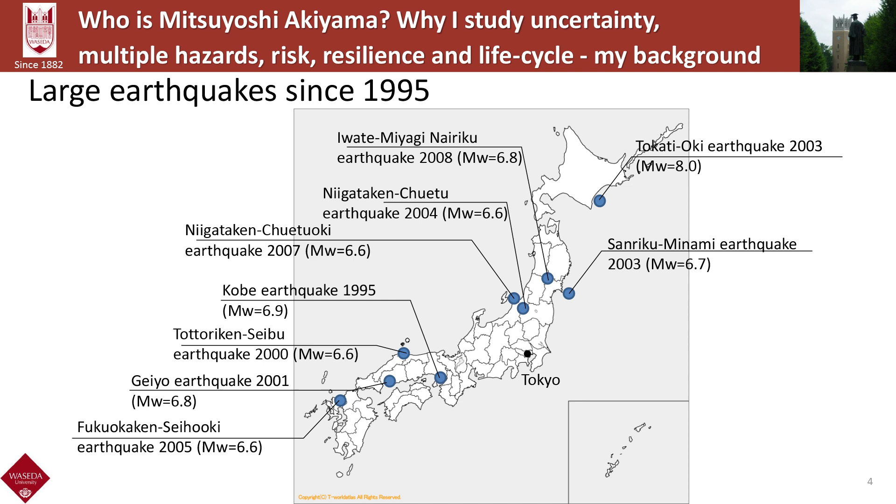Professor Kusunoki and Professor Hisada mentioned we have had so many disasters in Japan. I graduated from Tohoku University in 1995. Since then, we have had so many large earthquakes with moment magnitude larger than 6.5. In Japan, if moment magnitude is larger than 6.5, we say it's a big earthquake, so some infrastructure may have damage. So we have had so many big earthquakes since 1995.

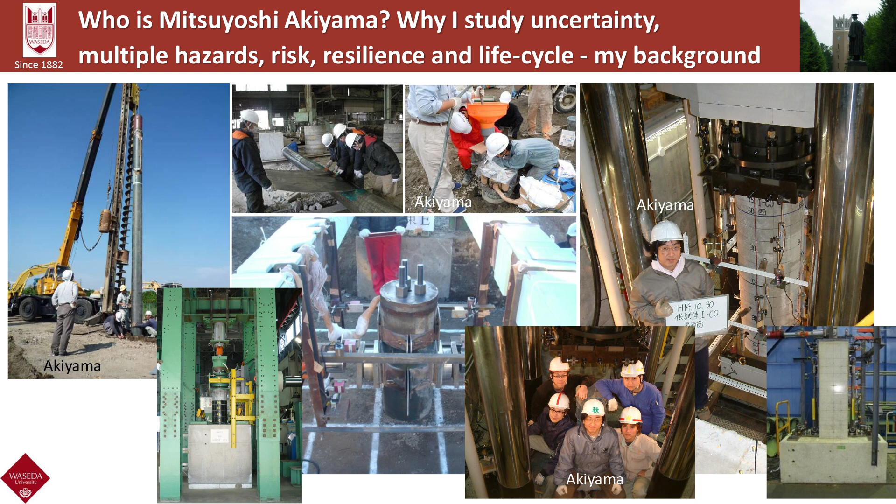My bachelor, my master, and my PhD research theme was all seismic. I conducted many experiments with the students at Tohoku University. After getting my PhD, I worked as a research associate, assistant professor, and associate professor, and did many seismic experiments and computations. At that time, I strongly believed my mission was to contribute to developing safer and more sustainable cities against big earthquakes.

But I made a big mistake. In 2004, as you know, the Indian Ocean tsunami occurred, and more than 200,000 people were killed. At that time, Tohoku University had a very unique research institute of tsunami. If my understanding is correct, there were only two research institutes of tsunami: one in Tohoku University, the other in Hawaii.

Professor Shuto asked me, why, AKIYAMA, do you only focus on ground motion? You also need to study the design of bridges and infrastructure against tsunami. But as I mentioned, at that time I strongly believed my mission was to do research on seismic issues, seismic design. So I didn't care about it.

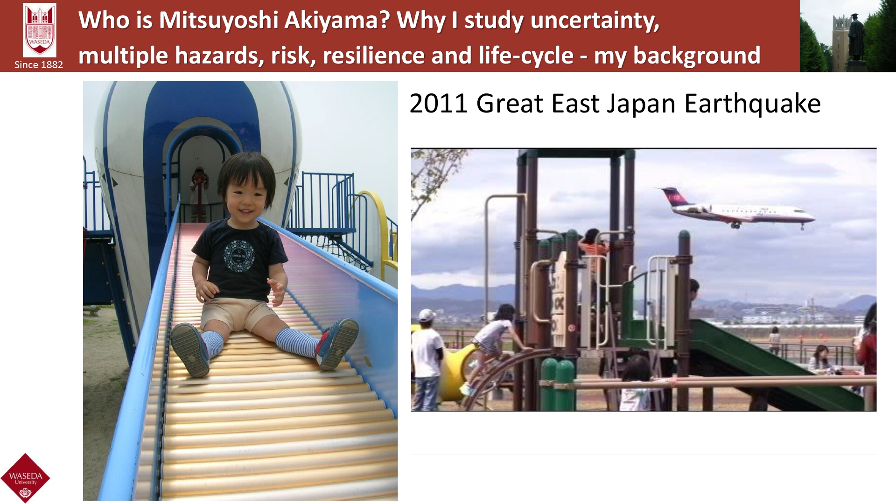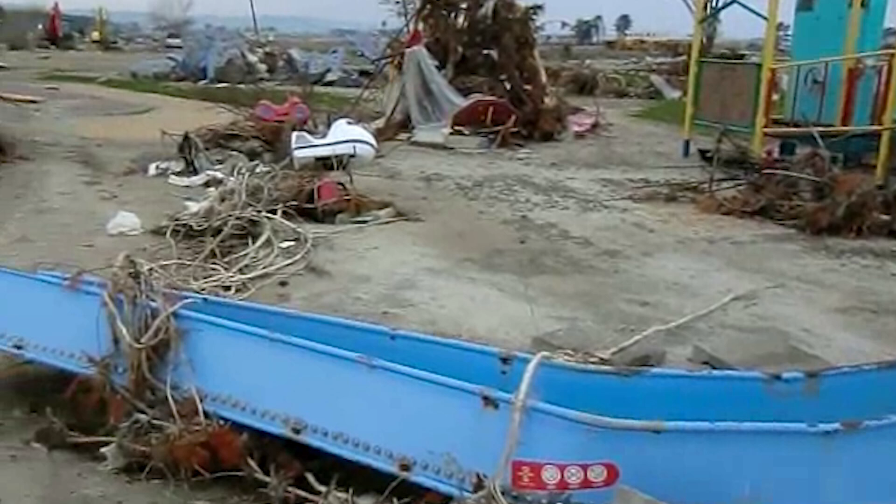In 2011, the Great East Japan earthquake occurred. At that time, I was still associate professor at Tohoku University, working with Professor Hisada. I often took my son, Ryuzo, to the park near Sendai Airport. He really enjoyed this park because he could see airplanes, and it is located very close to the coastline, so he could see the Pacific Ocean. This is a slider he enjoyed. All the facilities were completely destroyed. This is Sendai Airport.

So I made a very big mistake. I thought my research theme was to study seismic design or seismic assessment of performance of bridges. But in Japan, we have so many other disasters. So it's meaningless. We have to protect our infrastructure from all natural hazards.

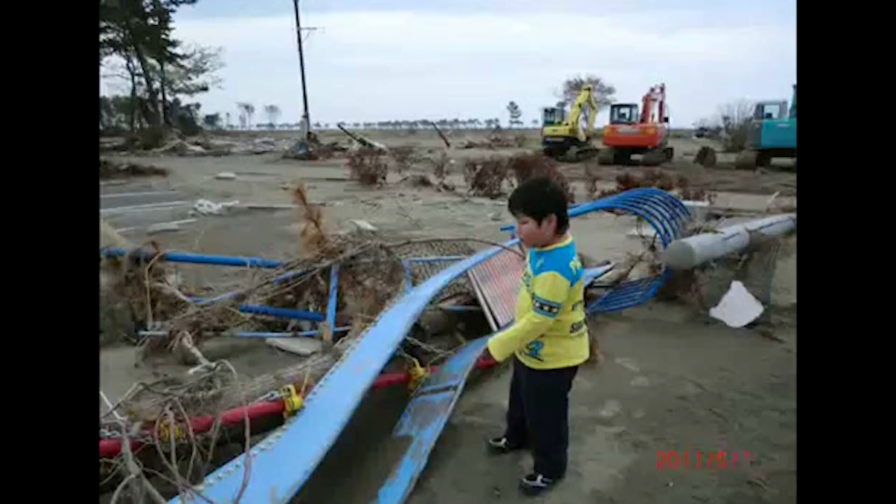Since then, I try to expand my research field. Fortunately, as I mentioned, I began to work with Professor FRANGOPOL in 2008. He's really a specialist of multiple hazards. He encouraged me to expand my research field to include other disasters.

Professor Hisada already introduced his office. This is my office at Tohoku University, and this is the building including our office. This building was completely destroyed and demolished. It's funny because I was teaching seismic design of concrete structures in this building. Then I realized I'm not qualified for teaching seismic design of concrete structures. Anyhow, then I moved to Waseda University in 2011.

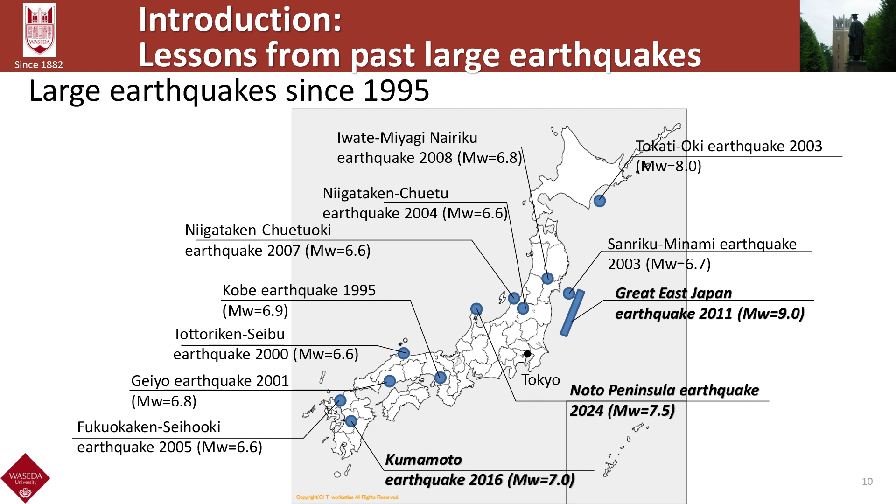I will introduce some lessons from three big earthquakes, including the 2011 Great East Japan earthquake, the 2016 Kumamoto earthquake, and the 2024 Noto Peninsula earthquake. Some pictures overlap with Professor Kusunoki's, so I will skip some slides.

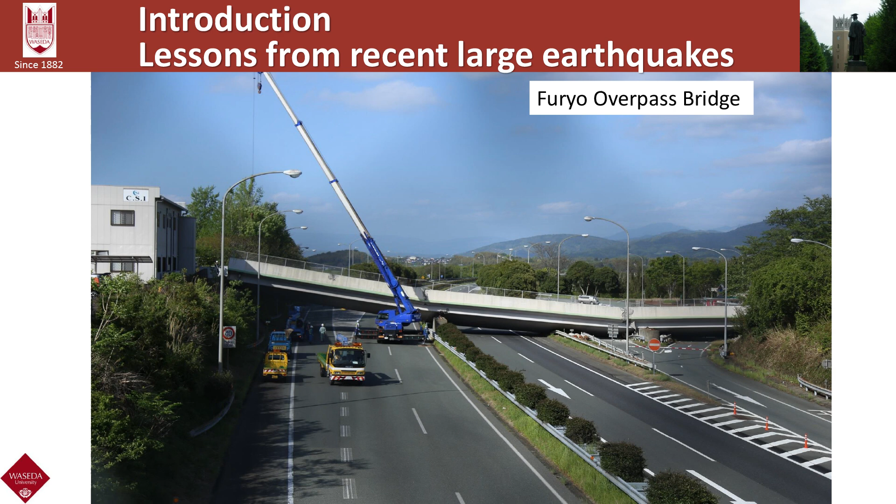This is an overpass bridge, completely collapsed due to the ground motion of the 2016 Kumamoto earthquake. This collapse prevented traffic passage on the Kyushu Expressway.

Actually, this is a local overpass bridge and not so important for local community. However, once the overpass bridge collapsed, this can prevent the traffic passage of highway, expressway. So we have to prioritize the seismic retrofit, considering this point importance.

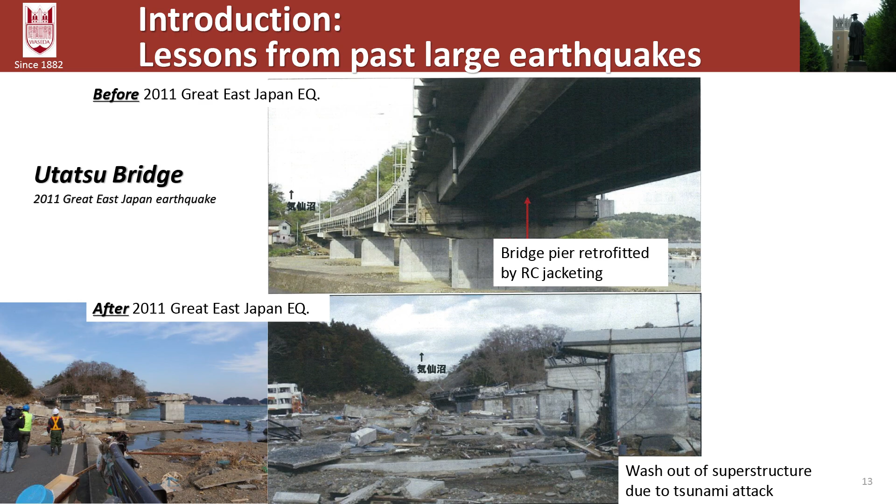Also, these are pictures taken before and after 2011 Great East Japan earthquake. You can see the concrete color is different because this bridge pier was also retrofitted using reinforced concrete jacketing. This seismic retrofit could prevent the damage from ground motion. However, this couldn't prevent washout of the superstructure.

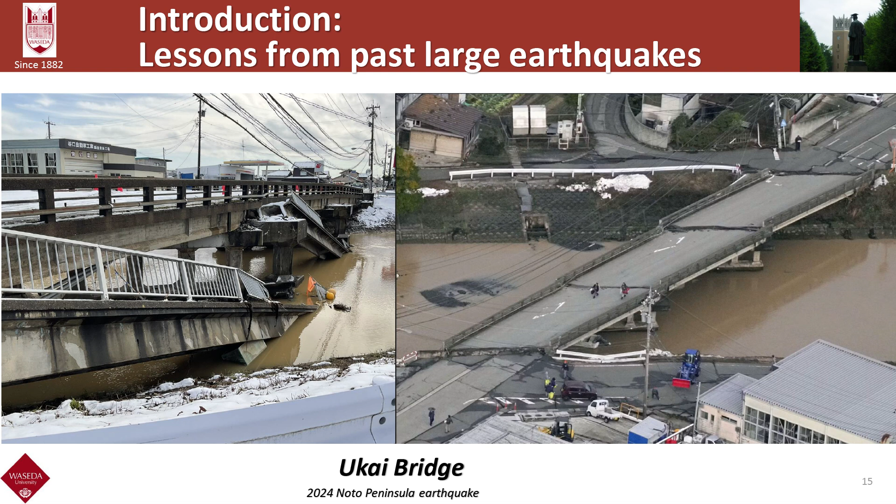This picture shows Ukai Bridge taken after the 2024 Noto Peninsula earthquake. As you can see, this bridge is a skewed bridge, right? And there are 3 pedestrian bridges, but 2 pedestrian bridges were destroyed, probably due to rotation of superstructure by ground motion. However, this one, there is no pedestrian bridge.

Where is this one? Yes, here. Oh no, here. Yeah, so this one was washed away due to tsunami. So this bridge had multiple actions. First, ground motion, and second, tsunami. So in Japan, if a bridge is located near coastline, we have to consider effect of not only ground motion, but also tsunami on the bridge performance.

Also, during the field investigation conducted after 2011 Great East Japan earthquake, I found many infrastructure and concrete structures deteriorated due to corrosion. In this region, during winter, they use a lot of de-icing salt. Also, in Japan, there are many coastlines. So due to airborne chloride, concrete structures deteriorate. So we have to evaluate structural performance considering the effect of material deterioration.

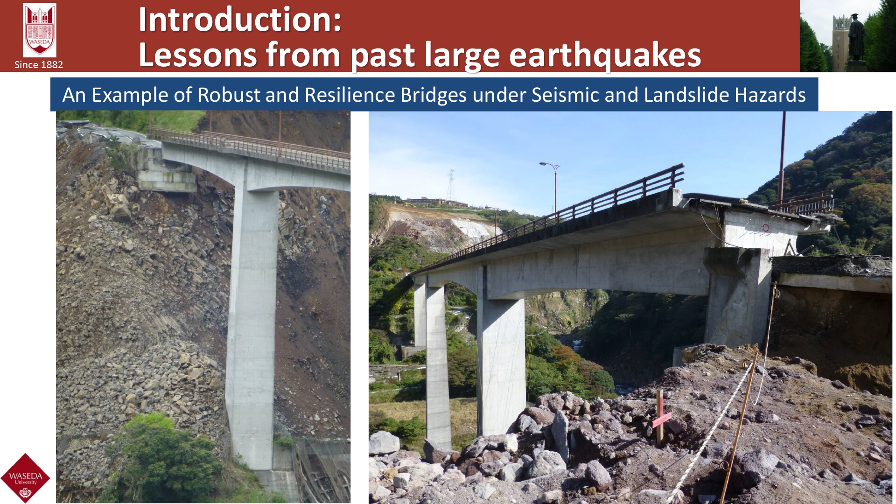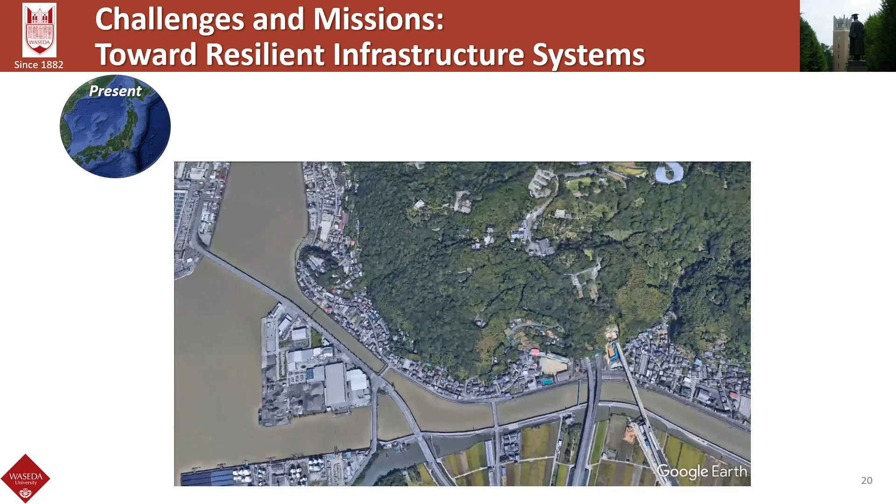So let me now introduce what we are doing based on these lessons from past disasters. Here is Japan, and now I focus on Kochi Prefecture. Kochi Prefecture is facing the Nankai Trough, which is a really big concern. It may be expected that economic loss and damage to structures and infrastructure systems may be larger than those from the 2011 Great East Japan earthquake. So we have to prepare for this big earthquake. And also, you can see this bridge is located near coastline, with very high temperature and very high humidity.

Here is very dry, so I need water. So. Okay, so

Now in my research team with Frangopol, we always see the bridge networks. Of course, sometimes we focus on individual bridges, but the most important part is bridge network: how to ensure the functionality of network subjected to multiple hazards. I will give you some ideas.

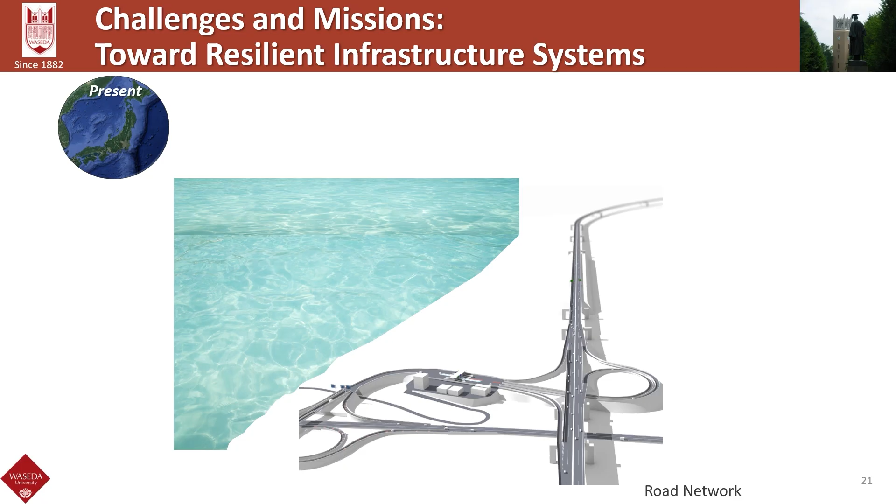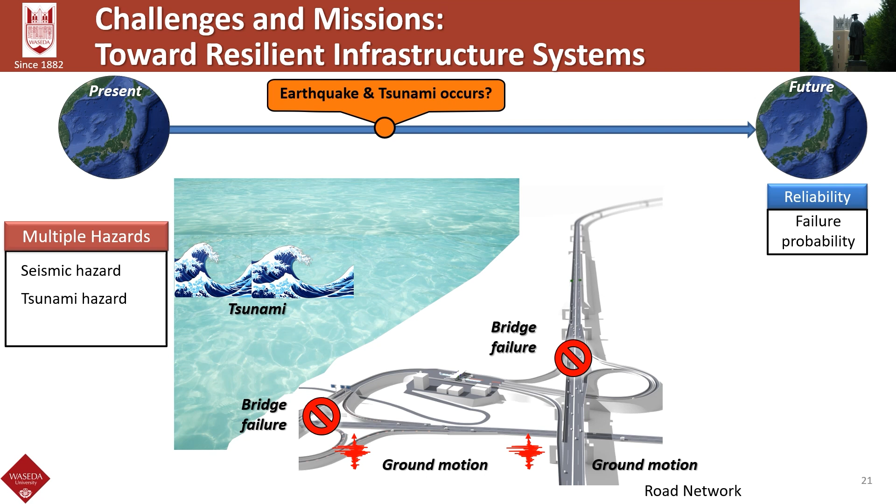So now, as I mentioned, in Japan, we have to consider seismic and tsunami hazard if network is located near coastline. Seismic and tsunami hazard can damage structures and infrastructures. So we have to quantify the risk and resilience. As you know, transportation network plays a crucial role, right, in the evacuation of affected people and the transportation of emergency goods and materials.

So what is the most troublesome obstacle? I believe one of them is disaster waste. Seismic and tsunami disasters always cause a huge amount of disaster waste. With the disaster waste, we cannot proceed the recovery process. We have to remove disaster waste. This is a very serious issue.

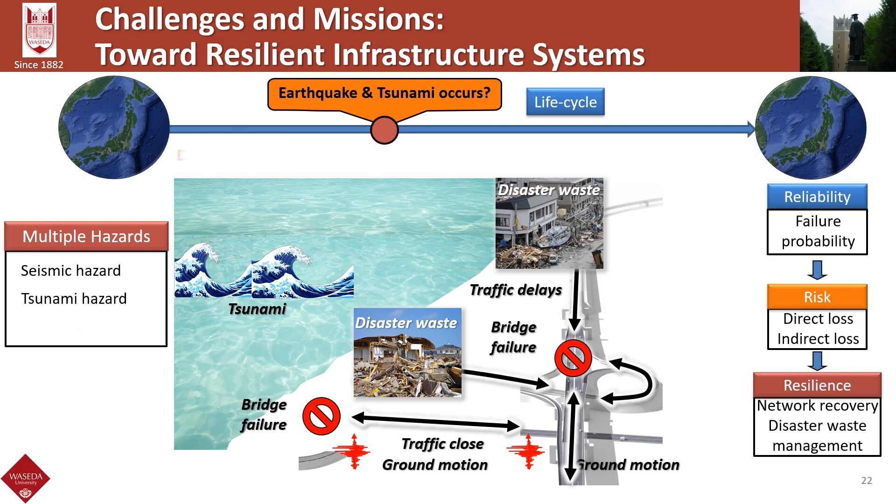Also, as I mentioned, if a structure is located near the coastline, we have to consider the effect of airborne chloride on the deterioration of materials. So proper modeling of structural systems for its entire life cycle, considering the time variant load and material deterioration, is needed.

Also, when we discuss time variant loading, climate change is now a really serious issue. Global warming could change the location of coastline and increase sea level rise. This is a difficult issue, like non-stationary sea level rise and non-stationary seismic actions. But intensified tsunami could cause more disaster waste and damage more structures and infrastructure. Global warming may also accelerate the deterioration of material.

So we have to consider all the disasters and natural hazards, and also consider how global warming affects the functionality of road networks.

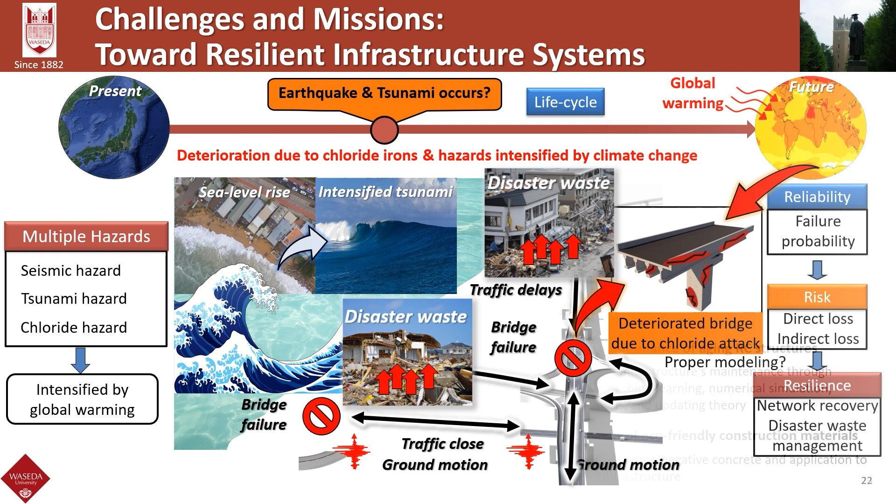So when we do research, we always consider 4 performance indicators: risk, resilience, reliability, and sustainability. With core technology such as machine learning - now a really powerful tool - and also numerical simulation such as finite element modeling, spatial modeling, and experiments to understand the real phenomena. So I will introduce some research activities based on these 4 performance indicators.

First is the resilience of infrastructure systems under multiple hazards. This is a really traditional topic: which bridge should be retrofitted first? Based on risk estimation and resilience quantification, we could identify which bridge should be retrofitted. But we also now have to care about which is more important, seismic retrofit or maintenance of deteriorated bridges. This should be considered when we prioritize retrofitting actions.

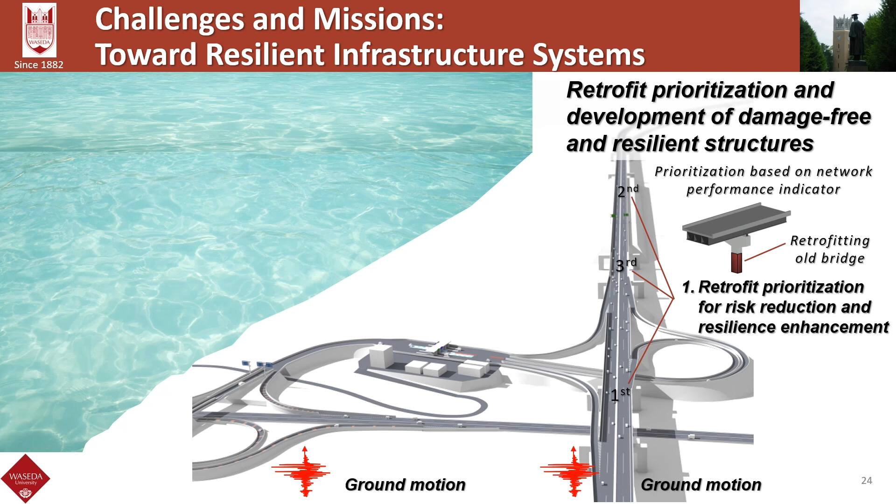Now we can use 3-dimensional printers. With 3D printers, we can make a very complicated structural shape, but very cheap, not expensive. So with the friction pendulum system, we can increase the seismic performance even more.

But in addition, for ground motions we have several ideas. But as I mentioned, for tsunami it's too severe - too much size, too strong an action. So for this kind of very catastrophic event, we are now saying we have to have an idea assuming the collapse of bridges.

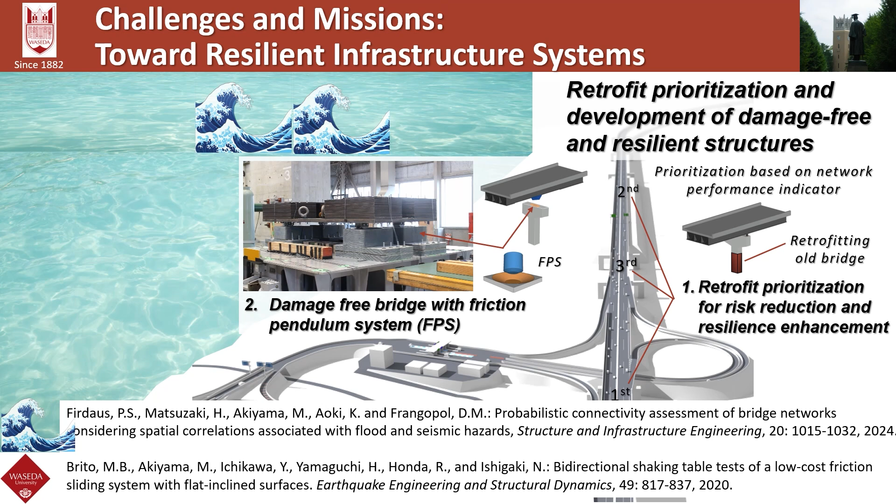So one idea is the ABC concept. In the US, they have this concept, accelerated bridge construction. They introduced this concept to save construction time on site. But this concept can also be introduced to a location with very high natural disaster hazard. Assuming the collapse of bridges, we can present some idea of how to reconstruct them. This can be used as a temporary bridge, which can contribute to the recovery process.

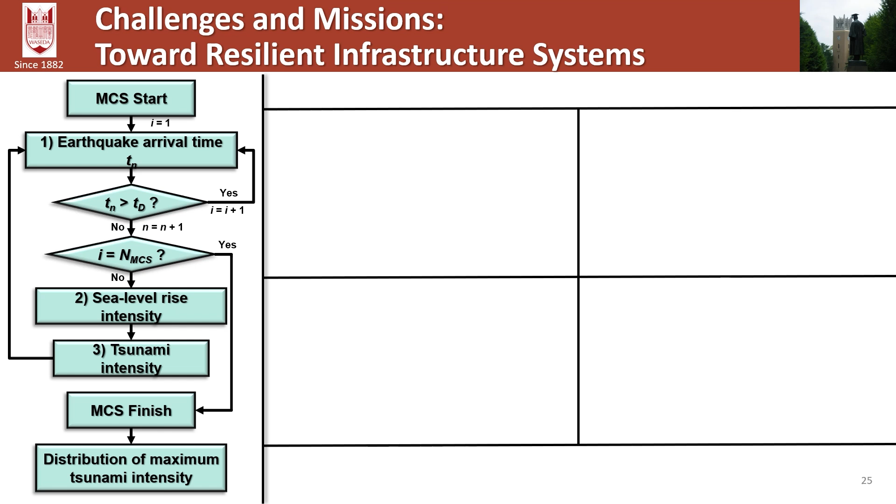Also, I want to introduce some activities on tsunami hazard assessment concerning the effect of sea level rise. There are several mathematical models to quantify seismic tsunami hazard, but if we have to combine the effect of sea level rise, this problem becomes really complicated.

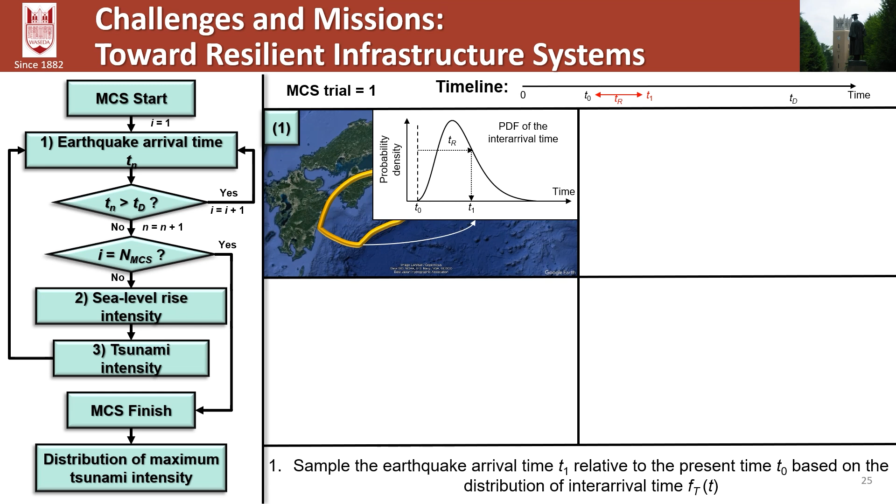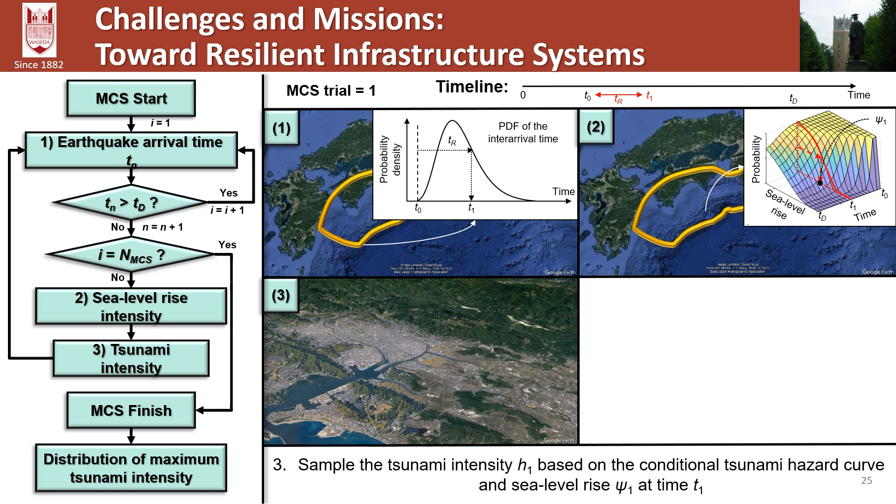My student Abdul Al-Hamido developed a procedure to quantify the probabilistic sea level rise hazard. Once we determine the time T1, we can evaluate sea level rise hazard. Then we conducted the tsunami propagation analysis. We can use GIS and obtain information on individual structures, so we can obtain the inundation depth due to tsunami. Combining sea level rise hazard and tsunami hazard, we can obtain a new tsunami hazard curve.

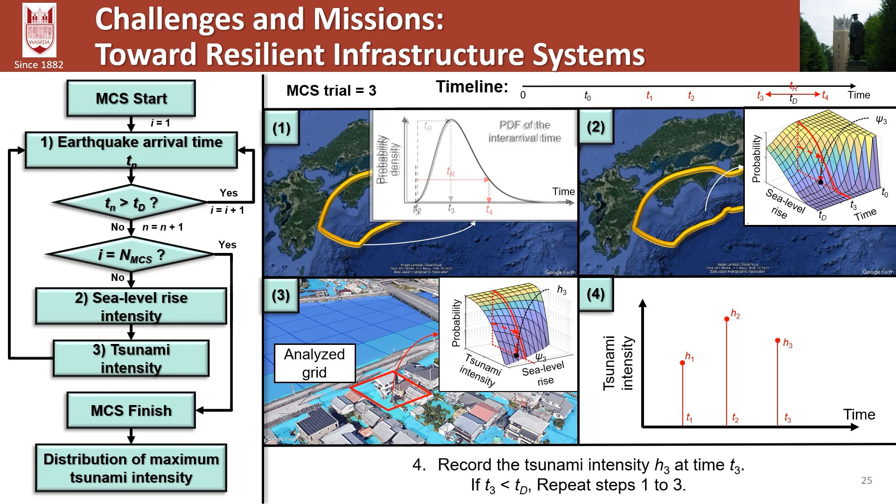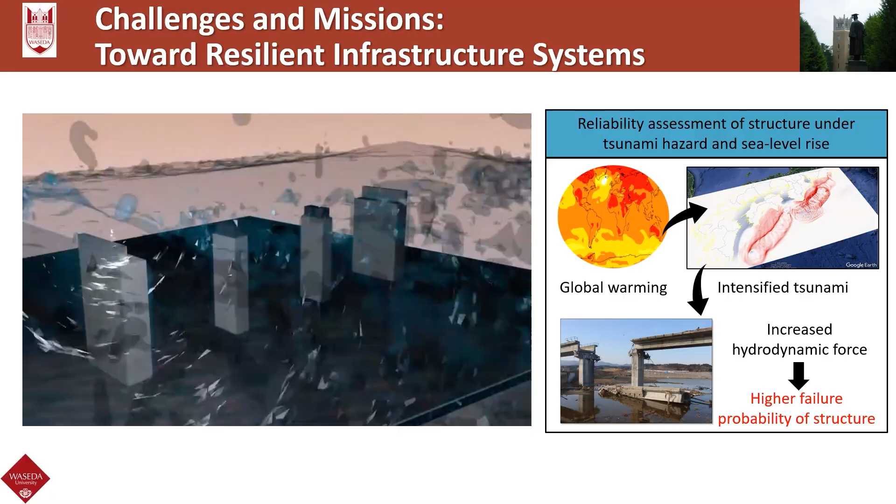We repeat this process from now until 2100, so we can have new hazard curves. This hazard curve can be applied to evaluate bridge failure due to tsunami. So now we can estimate, for the next 100 years, the failure probability due to tsunami.

However, the problem is more complicated, because before the tsunami arrives, ground motion comes first. So we have to evaluate tsunami fragility considering the effect of damage to the bridge due to ground motion. The actual process is seismic wave first, then we have to consider the tsunami effect. So the fragility curve should be revised considering the effect of damage to bridges.

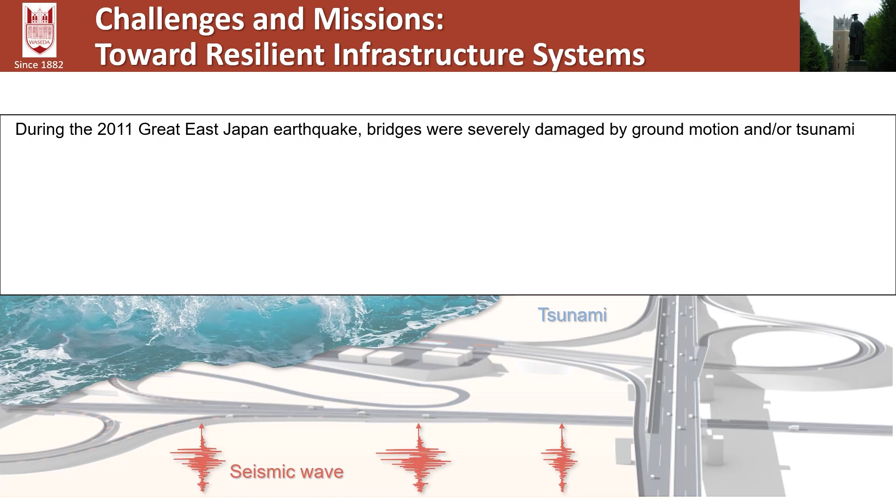Now my PhD student, Aoki-kun, developed a new model to evaluate the reliability of a bridge considering seismic and tsunami hazard, also climate change. It's a really complicated process, but the important point in his method is that he tried to evaluate connectivity considering the damage of individual bridges.

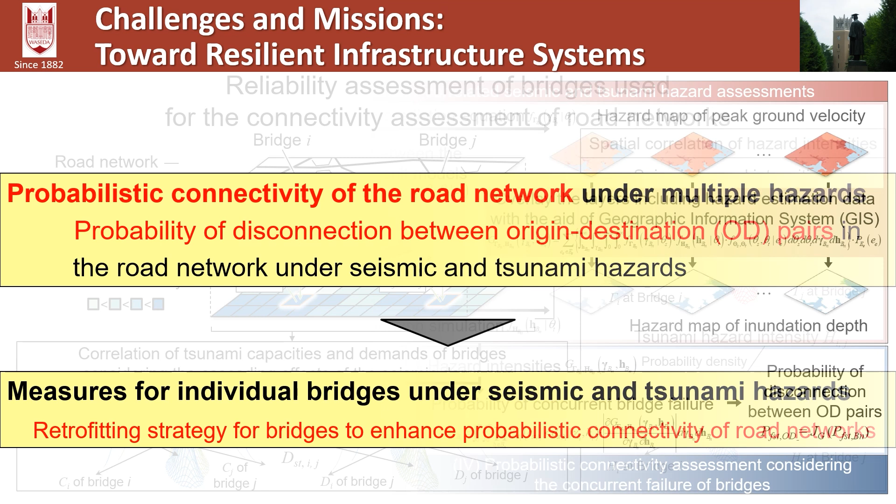So this is a whole procedure. If you are interested in this topic, connectivity assessment of road network exposed to multiple hazards, seismic and tsunami hazard.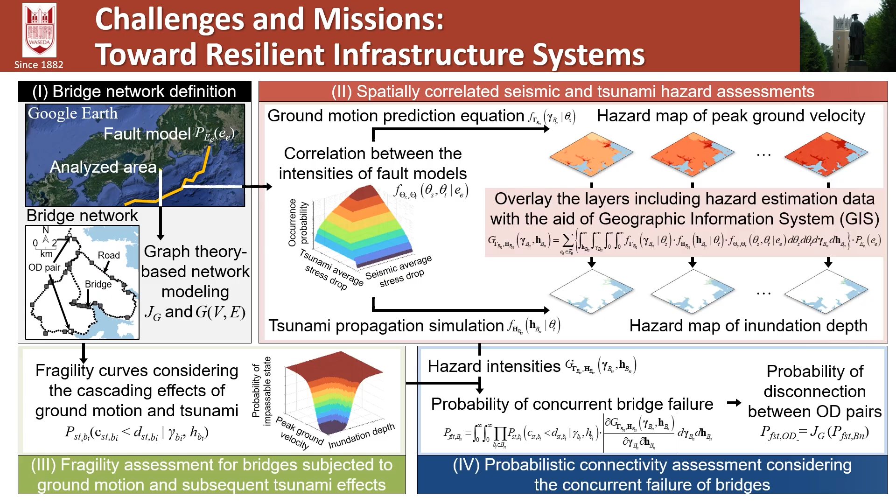He applied his method to a real road network in Mie Prefecture, facing high hazard of seismic and tsunami. Using his method, we can evaluate the network connectivity, and we can identify which hazard is more important, and what we should do to increase the connectivity of road networks even after seismic and tsunami events.

I used so much time. So now still mission 2, but I will accelerate.

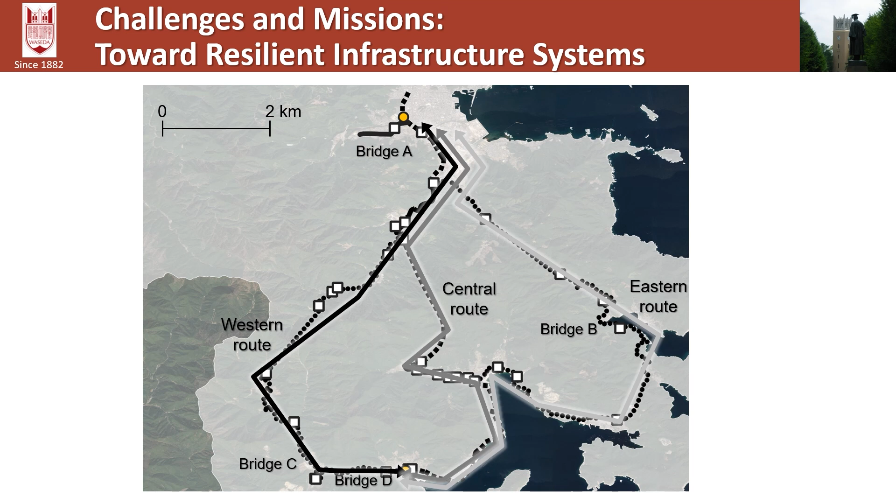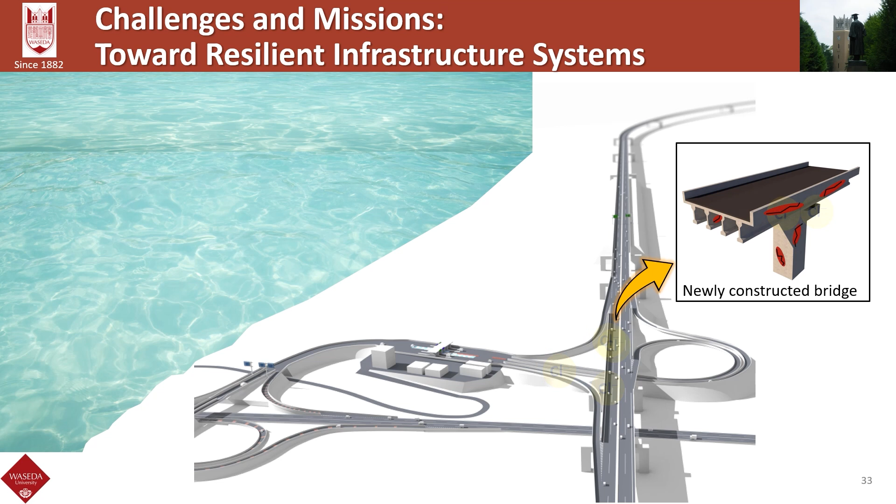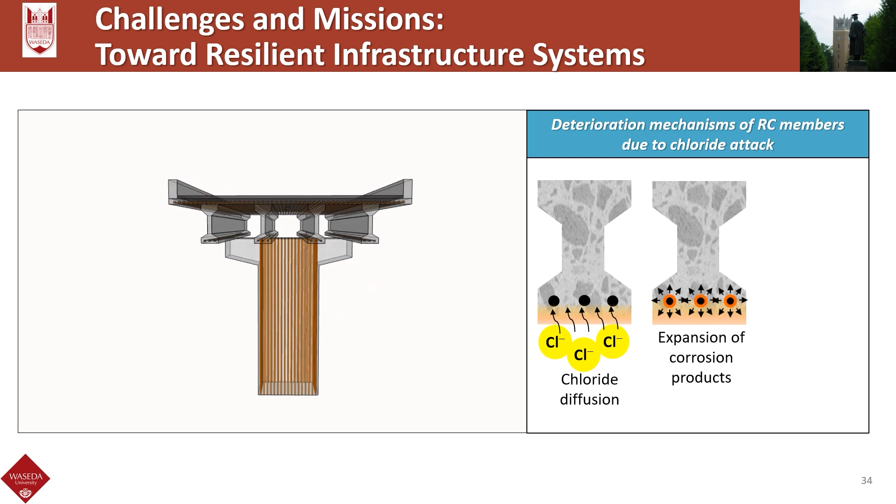If chloride content is larger than the threshold at the rebar, corrosion begins. Due to expansion of the corrosion product, we see cover cracking. But still, we cannot say if this is a bridge damaged by chloride attack. So from this picture, we still cannot answer two very simple questions: how long can we use this bridge, and how much does the bridge performance deteriorate?

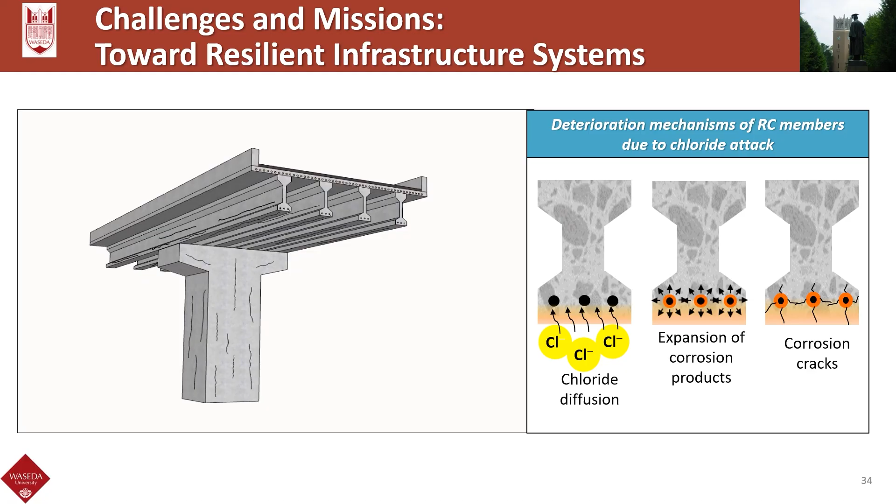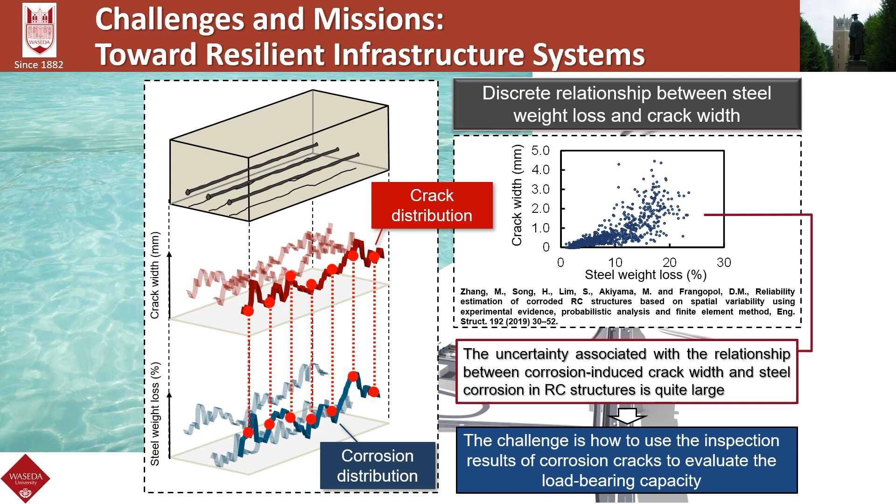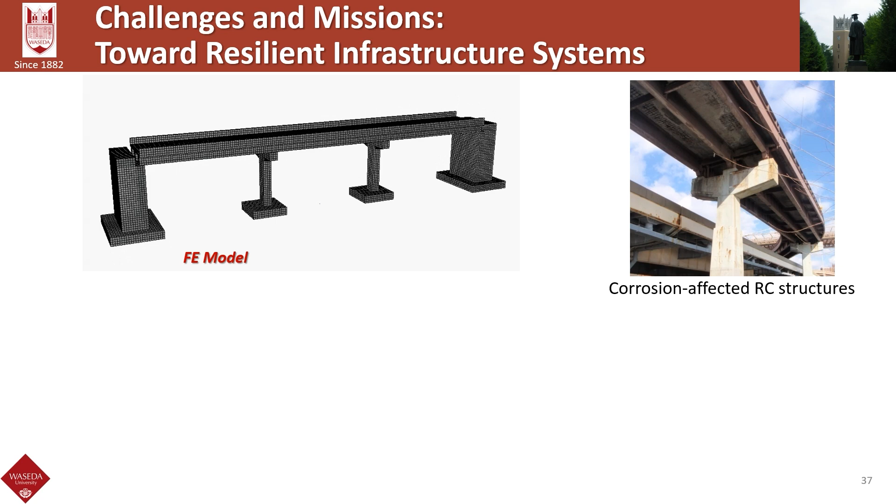For this problem, I and Professor Frangopol presented a new framework to evaluate the load-bearing capacity of deteriorated concrete bridges just based on the information of corrosion crack width. This process includes an experimental part, stochastic simulation, FE modeling, machine learning, and finally probabilistic prediction.

Today I don't have enough time, so I will present the outline. Once we obtain the corrosion crack width distribution, we can use machine learning to predict the steel weight loss distribution inside concrete. But we have to know there is a very big uncertainty, so we have to take a probabilistic approach. We repeat finite element analysis, and finally we can obtain the PDF, probability density function, of flexural resistance.

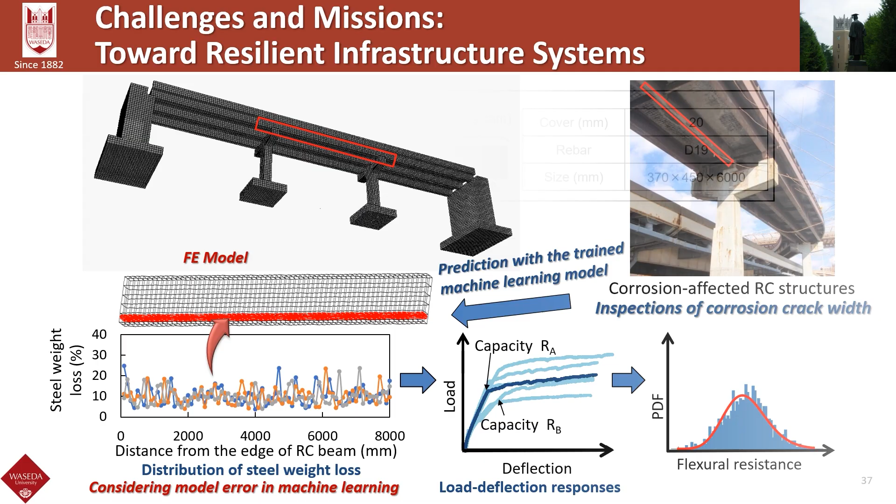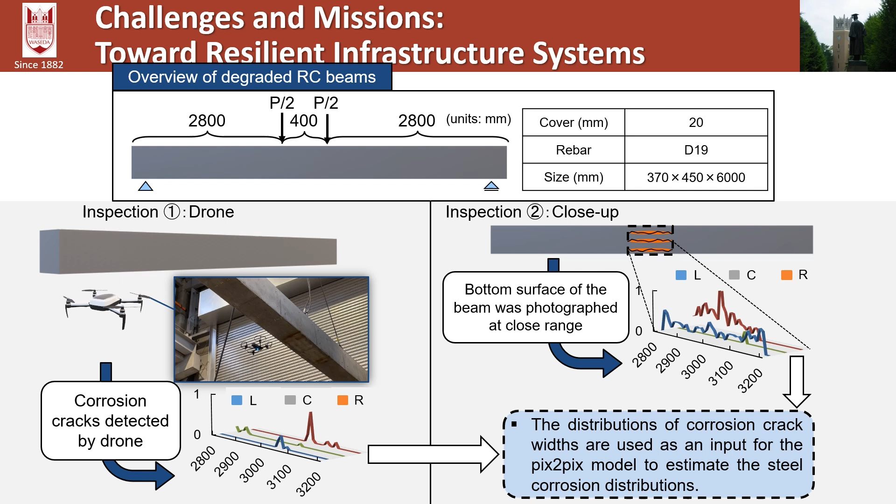This is a simple case study using 6-meter RC beams. We use a drone to take corrosion images associated with corrosion cracks, and based on this digital image we can get the corrosion crack width. This is a real picture of corrosion cracks.

You can see, if we take a picture very close using RGB, the image is very clear. But if we use a drone, it's not so clear, because the drone is sometimes not so stable, and also the lighting is not so bright. So you can see the difference in image quality.

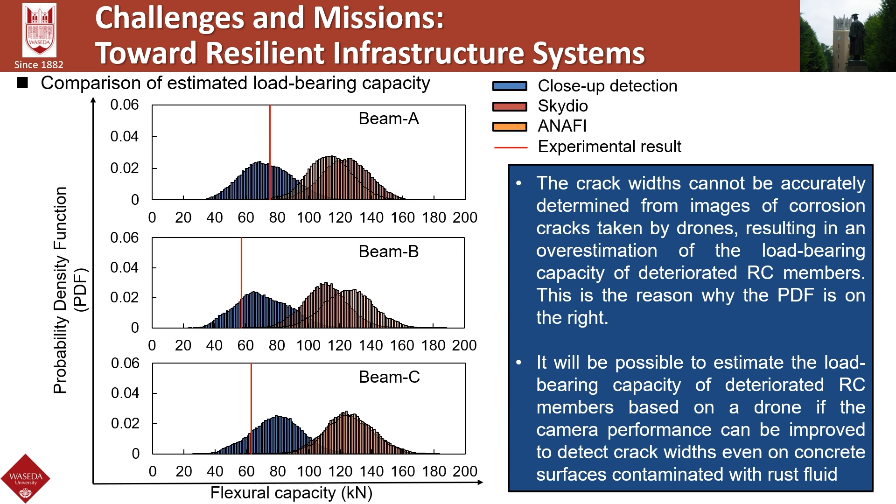So we conducted the loading test to know the actual maximum load, and we compared how our PDF is close to the experimental result. The red line shows the experimental loading test result. Mostly, if we can have a very clear image, our PDF mean is very close to the loading test result, it's fine. However, if we estimate a PDF based on images taken by drone, it's really overestimated because the image quality is not good.

If we use images of corrosion cracks taken by drone, there are almost no visible corrosion cracks, so the flexural capacity is overestimated.

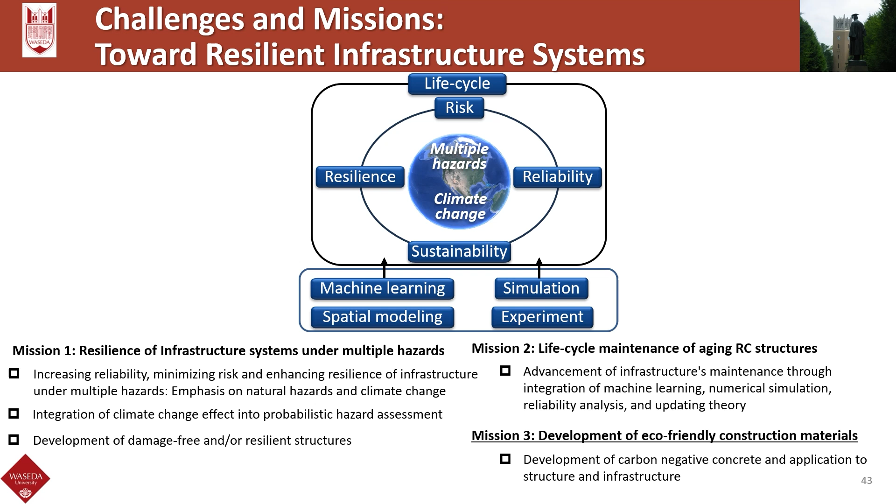Very sorry, so this is the last mission, mission 3. Now in international associations, there are many research activities on climate change in the field of structural engineering. In IABSE Commission 6, IABSE has 6 commissions, and Commission 6's theme is sustainability. Now I'm chair of Commission 6, and the vice chair is a professor at Tongji University.

Also ASCE has a technical council on life cycle performance. The founder is Professor Frangopol, and the current chair is Professor Fabio Biondini. Both these activities are focused on how climate change affects structural performance. This is the main target.

But as a structural engineer, I want to contribute to stopping global warming, because the concrete industry produces so much CO2. So I want to reduce the total amount of CO2.

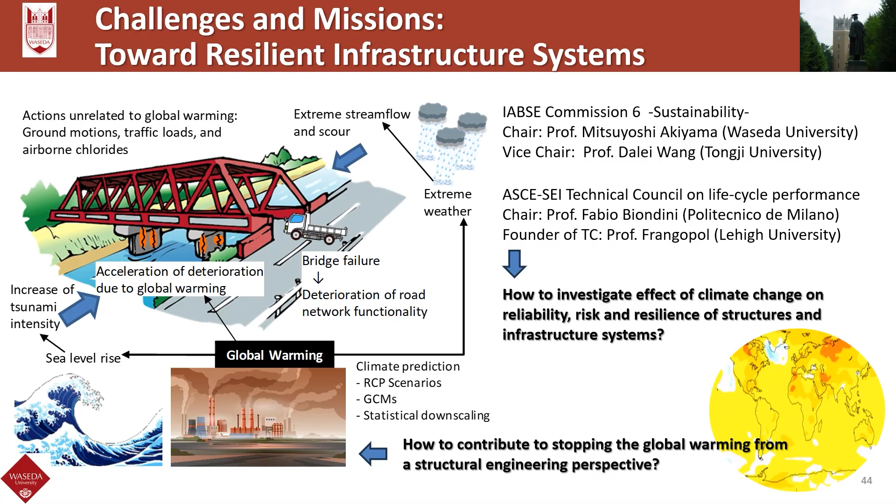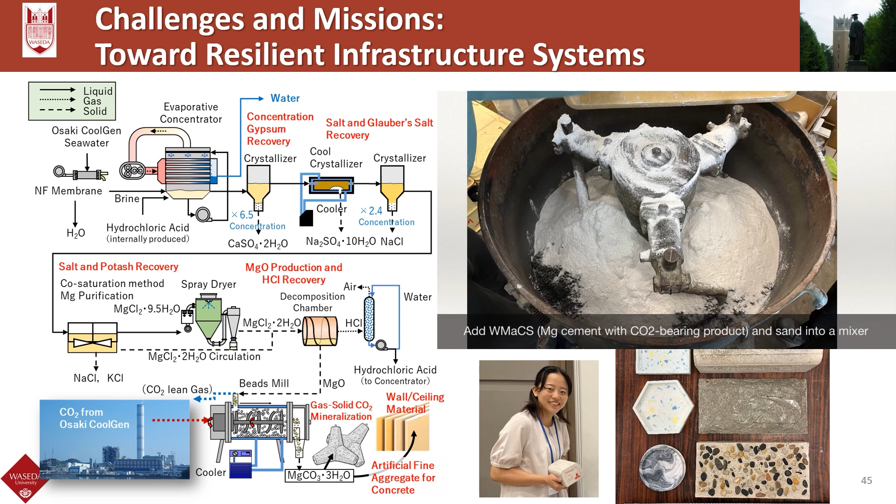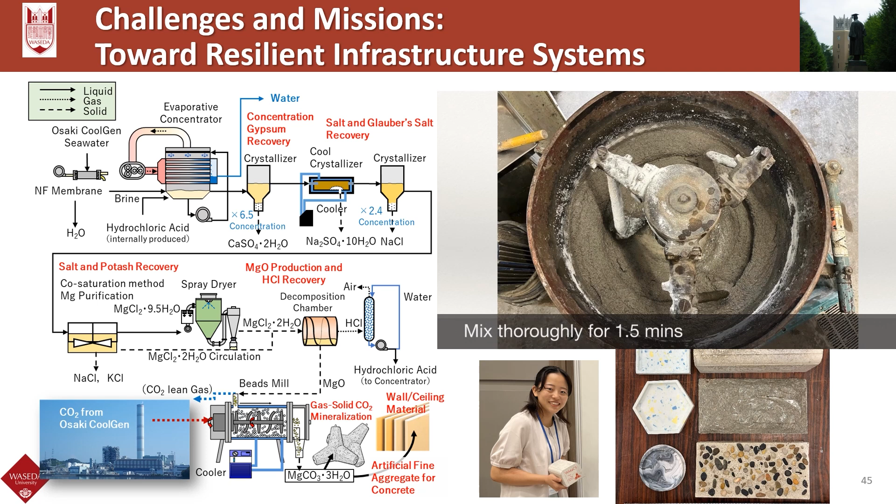My colleague, Professor Nakagaki at Waseda University, developed a very interesting idea. He can make a new powder from CO2 and seawater, and this is the powder. It's not calcium, it's magnesium, but you can see it almost looks like concrete, right? Only from CO2 and seawater, we can make new concrete. It's really carbon-negative concrete.

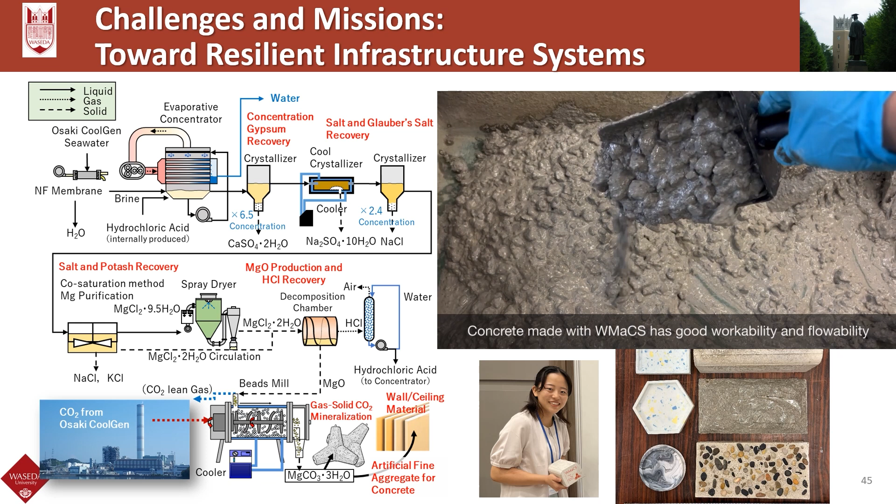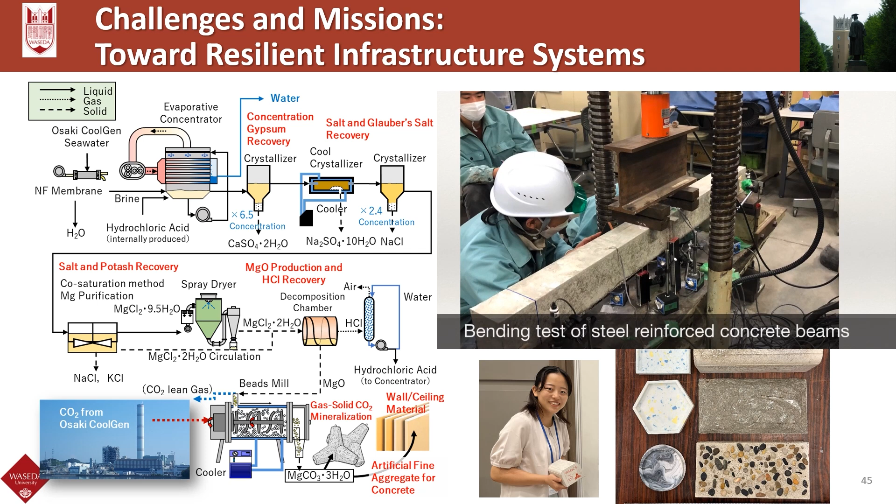So now we try to make some new products, but at this moment we face a very difficult issue, because this concrete is made of seawater, it includes too much chloride content. But in the future, we will try to apply this concrete to infrastructure.

I'm sorry I talked too much, but I and Professor Dan Frangopol want to work toward safer, more resilient, and sustainable infrastructure systems. I would like to thank all my colleagues and my past and current students. Thank you very much.